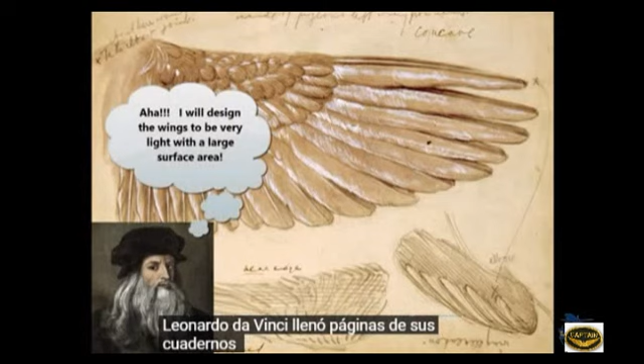From prehistoric times, humans have watched the flight of birds, longed to imitate them, but lacked the power to do so. During the 1500s, Leonardo da Vinci filled pages of his notebooks with sketches of proposed flying machines, but most of his ideas were flawed because he clung to the idea of bird-like wings.

The quest for human flight led some practitioners in another direction. In 1783, the first manned hot air balloon, crafted by Joseph and Etienne Montgolfier, flew for 23 minutes. 10 days later, Professor Jacques Charles flew the first gas balloon.

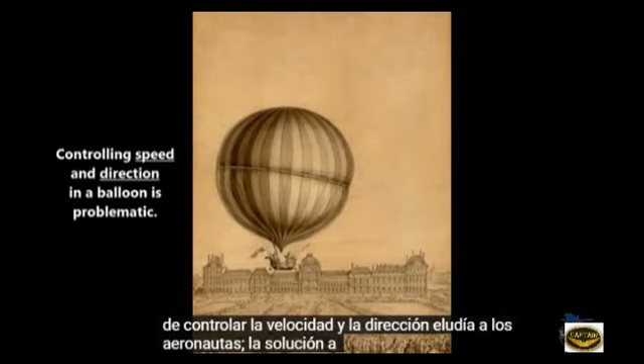Balloons solved the problem of lift, but that was only one of the problems of human flight. The ability to control speed and direction eluded balloonists. The solution to that problem lay in a child's toy, familiar to the East for 2,000 years, but not introduced to the West until the 13th century: the kite.

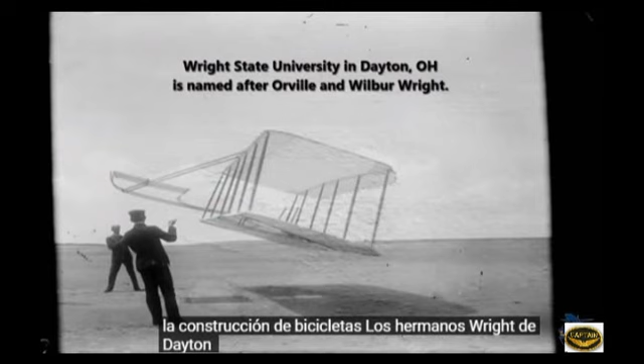The bicycle-building Wright brothers of Dayton, Ohio, had experimented for 4 years with kites, their own homemade wind tunnel, and different engines to power their biplane. By the afternoon of December 17th, the Wright brothers had flown a total of 98 seconds on 4 flights. The age of flight had arrived.

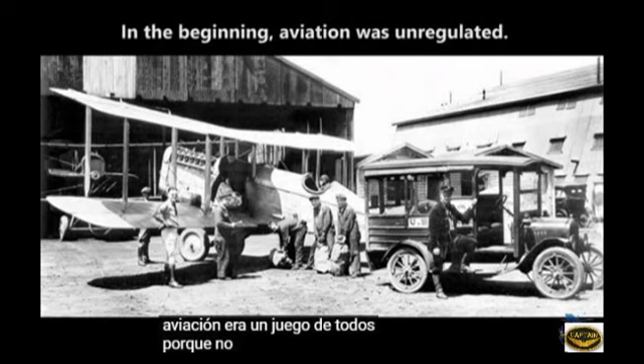During the early years of manned flight, aviation was a free-for-all because no government body was in place to establish policies or regulate and enforce safety standards. On May 20, 1926, Congress passed the Air Commerce Act, which served as the cornerstone for aviation within the United States. This legislation was supported by leaders in the aviation industry who felt that the airplane could not reach its full potential without assistance from the federal government in improving safety.

Equally important for safety was the establishment of a system of certification for aircraft. On March 29, 1927, the Aeronautics branch issued the first airworthiness type certificate to the Buhl Airster CA-3, a 3-place open biplane. In 1934, to recognize the tremendous strides made in aviation and to display the enhanced status within the department, the Aeronautics branch was renamed the Bureau of Air Commerce.

In 1938, the Civil Aeronautics Act transferred the civil aviation responsibilities to a newly created independent body named the Civil Aeronautics Authority. By mid-century, air traffic had increased, and jet aircraft had been introduced into the civil aviation arena. A series of mid-air collisions underlined the need for more regulation of the aviation industry.

The Federal Aviation Act of 1958 established a new independent body that assumed the roles of the CAA and transferred the rulemaking authority to the newly created Federal Aviation Agency. Shortly after, the Federal Aviation Agency was renamed to the Federal Aviation Administration.

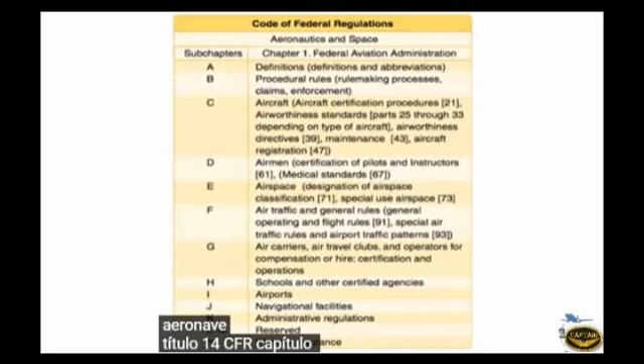Title 14 CFR Chapter 1, Federal Aviation Administration, is broken down into subchapters A through N, as illustrated in the figure. For the pilot, certain parts of 14 CFR are more relevant than others.

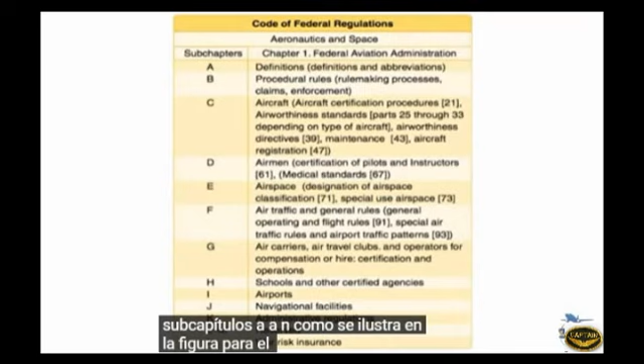During flight training, it is helpful for the pilot to become familiar with the parts and subparts that relate to flight training and pilot certification.

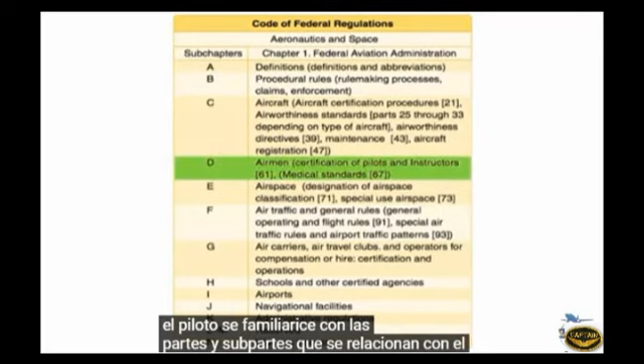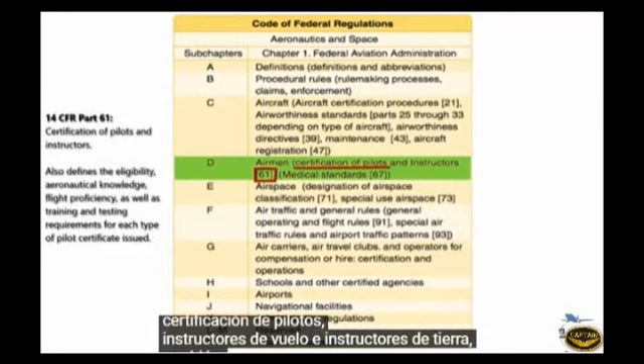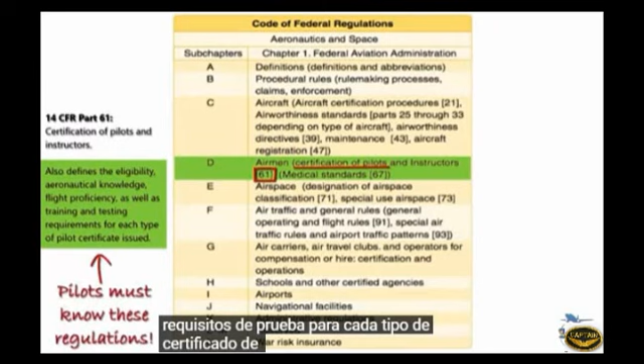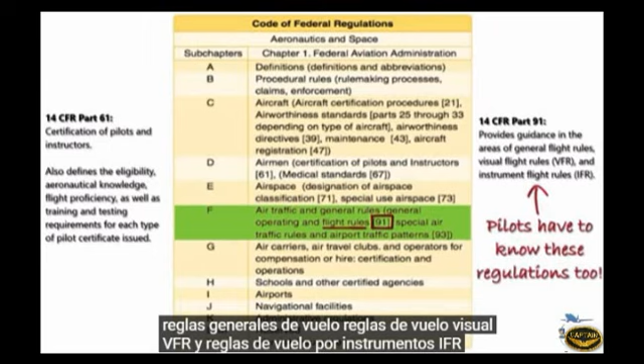For instance, 14 CFR Part 61 pertains to the certification of pilots, flight instructors, and ground instructors. It also defines the eligibility, aeronautical knowledge, flight proficiency, as well as training and testing requirements for each type of pilot certificate issued. 14 CFR Part 91 provides guidance in the areas of general flight rules, visual flight rules (VFR), and instrument flight rules (IFR), while 14 CFR Part 43 covers aircraft maintenance, preventive maintenance, rebuilding, and alterations.

The FAA, in concert with other government agencies, orchestrates the publication and changes to publications that are key to safe flight. In addition to the regulations provided online by the FAA, several other publications are available to the user. Almost all reference material is available online in downloadable format.

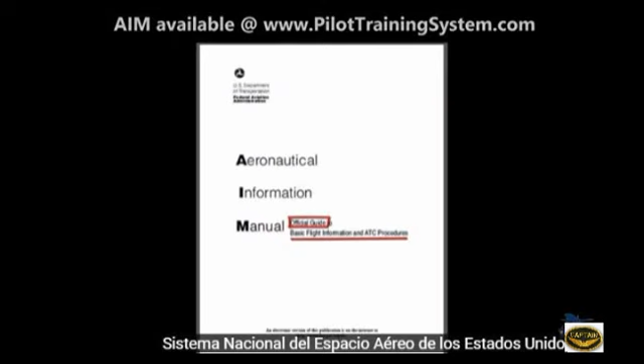The Aeronautical Information Manual, AIM, is the official guide to basic flight information and ATC procedures for the aviation community flying in the National Airspace System of the United States. The AIM also contains information of interest to pilots, such as health and medical facts, flight safety, a pilot controller glossary of terms used in the system, and information on safety, accidents, and reporting of hazards.

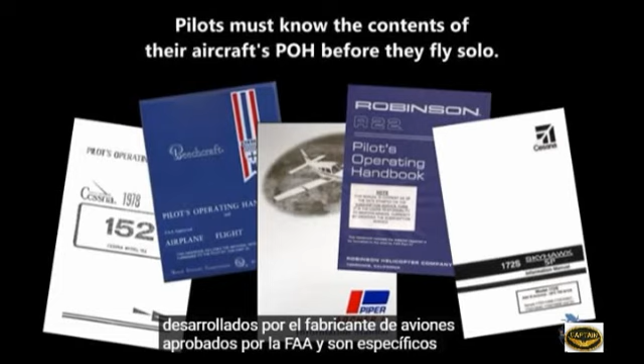Handbooks are developed to provide specific information about a particular topic that enhances training or understanding. The FAA publishes a variety of handbooks that generally fall into three categories: aircraft, aviation, and examiners and inspectors. Aircraft flight manuals, commonly called Pilot Operating Handbooks, POH, are documents developed by the airplane manufacturer, approved by the FAA, and are specific to a particular make and model aircraft by serial number.

Advisory circulars, ACs, provide a single, uniform, agency-wide system that the FAA uses to deliver advisory material to FAA customers, industry, the aviation community, and the public. Notices to Airmen, NOTAMs, contain time-critical aeronautical information. NOTAMs contain current notices to airmen, which are considered essential to the safety of flight.

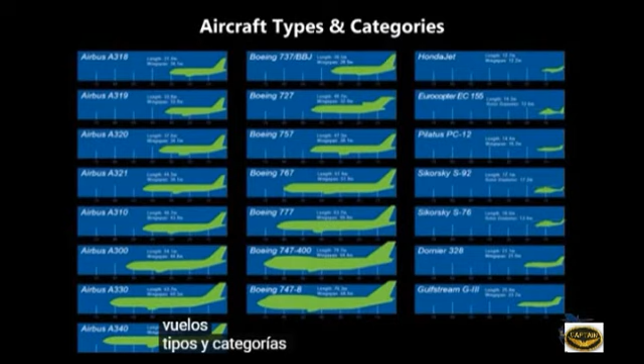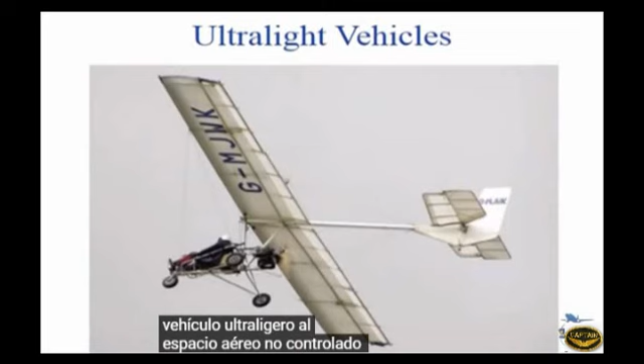Aircraft types and categories. Ultralight vehicles do not require any form of pilot license or certification if they are flown within 14 CFR 103 operating rules, which generally limit the ultralight vehicle to uncontrolled airspace and no flight over populated areas. In 2004, the FAA approved a new pilot certificate and aircraft category program to allow individuals to join the aviation community by reducing training requirements that affect the overall cost of learning to fly.

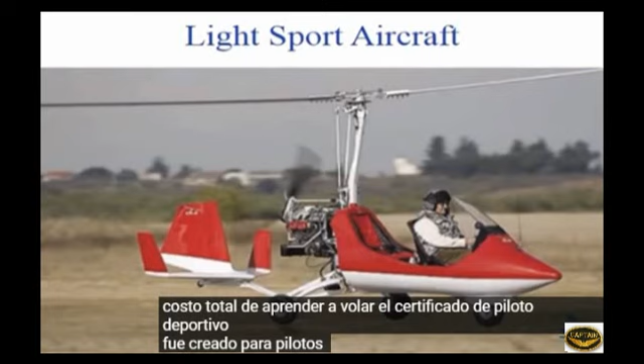The Sport Pilot Certificate was created for pilots flying lightweight, simple aircraft and offers limited privileges. The type of intended flying will influence what type of pilot certificate is required. Eligibility, training, experience, and testing requirements differ depending on the type of certificate sought.

A private pilot is one who flies for pleasure or personal business. Passengers may be carried, and flight in furtherance of a business is permitted. However, a private pilot may not be compensated in any way for services as a pilot, although passengers can pay a pro rata share of flight expenses, such as fuel or rental costs.

A commercial pilot may be compensated for flying. Training for the certificate focuses on a better understanding of aircraft systems and a higher standard of airmanship. A commercial airplane pilot must be able to operate a complex airplane, and at least a portion of the practical examination is performed in a complex aircraft.

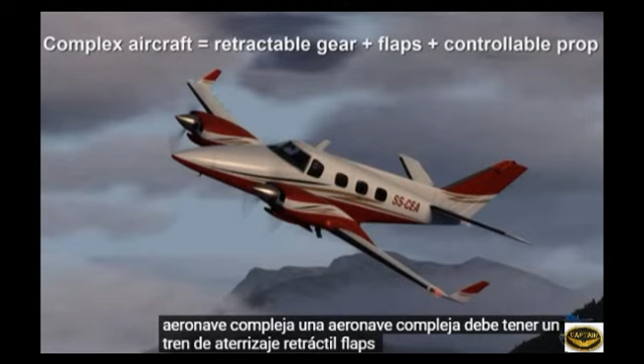A complex aircraft must have retractable landing gear, movable flaps, and a controllable pitch propeller. The airline transport pilot is tested to the highest level of piloting ability. The ATP certificate is a prerequisite for acting as a pilot in command of scheduled airline operations. The minimum pilot experience is 1,500 hours of flight time. In addition, the pilot must be at least 23 years of age.

Selection of a flight school is an important consideration in the flight training process. FAA-approved flight schools, non-certificated flying schools, and independent flight instructors conduct flight training in the United States, following the regulations outlined in either 14 CFR Part 141 or 61.

14 CFR Part 141 flight schools are certificated by the FAA. Enrollment in a 14 CFR Part 141 flight school ensures quality and continuity because these facilities must document the training curriculum and have their flight courses approved by the FAA. These strictures allow 14 CFR Part 141 schools to complete certificates and ratings in fewer flight hours.

The minimum requirement for a private pilot certificate is 35 hours in a Part 141 certificated school and 40 hours in Part 61 schools.

14 CFR Part 61 outlines certificate and rating requirements for pilot certification through non-certificated schools and individual flight instructors. One advantage of flight training under 14 CFR Part 61 is its flexibility. Flight lessons can be tailored to the individual student because Part 61 dictates the required minimum flight experience and knowledge-based training necessary to gain a specific pilot's license, but it does not stipulate how the training is to be organized. This flexibility can also be a disadvantage because a flight instructor who fails to organize the flight training can cost a student pilot time and expense through repetitious training.

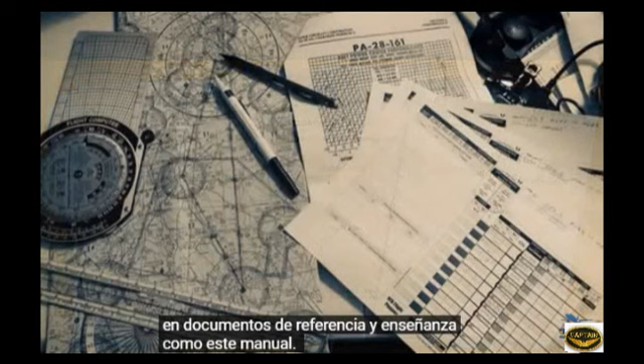Since the FAA requires all practical tests be conducted in accordance with the appropriate PTS, the pilot applicant should become familiar with this book during training. Descriptions of tasks and information on how to perform maneuvers and procedures are contained in reference and teaching documents such as this handbook. The CFI best determines when an applicant is qualified for the practical test.

A practice practical test is an important step in the flight training process. The applicant will be asked to present the following documentation: FAA Form 8710-1, application for an airman certificate and/or rating, with the flight instructor's recommendation.

An Airman Knowledge Test report with a satisfactory grade, a medical certificate and a student pilot certificate endorsed by a flight instructor, and the pilot logbook records.

The applicant must provide an airworthy aircraft with equipment relevant to the areas of operation required for the practical test. He or she will also be asked to produce and explain the aircraft's registration certificate, aircraft's airworthiness certificate, aircraft's operating limitations or FAA-approved aircraft flight manual if required, aircraft equipment list, required weight and balance data, maintenance records, and applicable airworthiness directives.

This concludes your introduction to flying. There are many different levels of aviation interest, from recreational and private pilots to commercial and airline transport pilots. Wherever your interests lie, there is one thing that all pilots have in common, and that is the fact that we all continually train and hone our flight skills to be safer and more effective behind the controls.